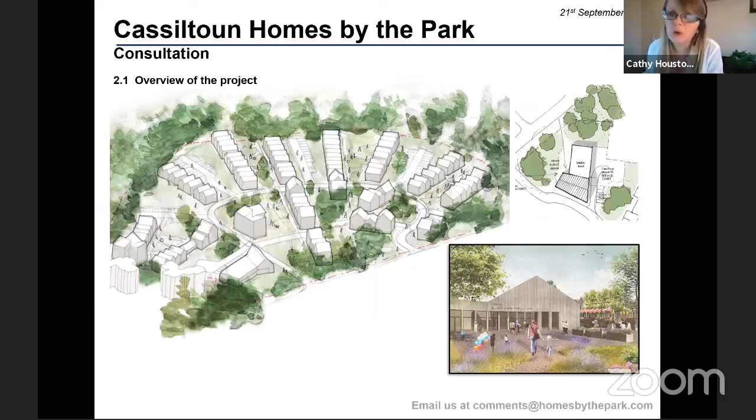So to give you a quick overview of what's proposed, there are two principal elements: there's the housing and there's a social enterprise and wellbeing centre proposed as part of the scheme. On the housing side, we're exploring the possibility of up to 140 homes within the site. These will be a mix of tenures, affordable housing, private housing, for different types of households, so families, young couples, elderly, people with restricted mobility, wheelchair accessible homes.

The Social Enterprise and Wellbeing Centre is a key part of the proposal. This is a new building to allow Cassiltoun Housing Association to continue a lot of the good work that they already do, providing additional community space, facilities for horticultural workers, and supporting other local organisations, for example those involved in childcare and horticultural growing. Cassiltoun are working hard behind the scenes to secure funding for this, and we would welcome any feedback on this also as part of this consultation.

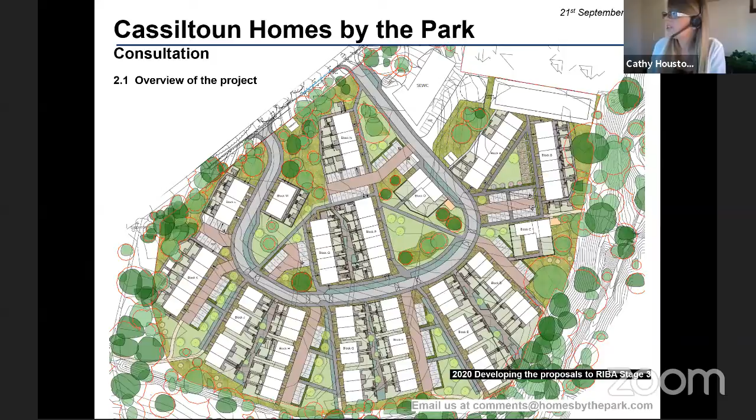So here's what we know about the site. I thought it was useful to cover this. The site uniquely benefits from having one of the most distinctive and attractive parklands in Glasgow on its doorstep. Castlemilk Park contains some of the oldest trees in Glasgow and is part of a designed landscape of fish ponds, walkways, bridges, heritage trails and community artworks.

The parkland is also a focal point for activities led by Cassiltoun Housing Association and others. The Housing Association is very active within their neighbourhood with a dedicated community development officer, a woodlands officer and a regeneration manager. The team successfully deliver an annual programme of events each year with the parkland as the principal venue for a lot of the activities such as wildflower walks, woodland strollers clubs, inspiring nature events, family fun days and festivals and various other things.

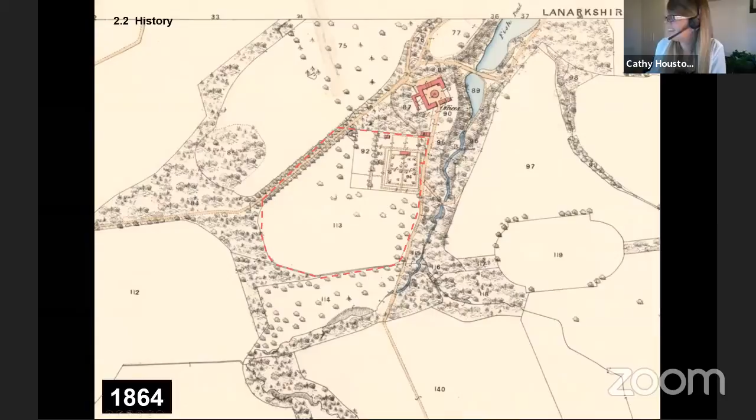So the site benefits from having a rich and varied history, and the wealth of information available is significant. I'm going to skip through a few of the historic plans because we do have quite a few - a lot of this information will be available on the website if anyone wishes to jump back in and have another look. Starting at 1864, this is our oldest plan, with early signs of development taking place.

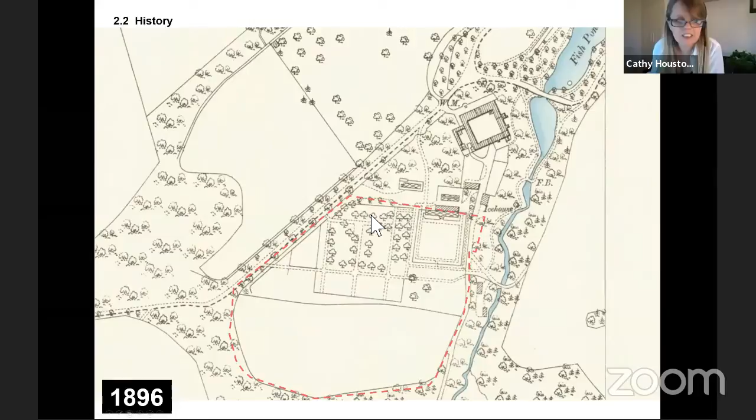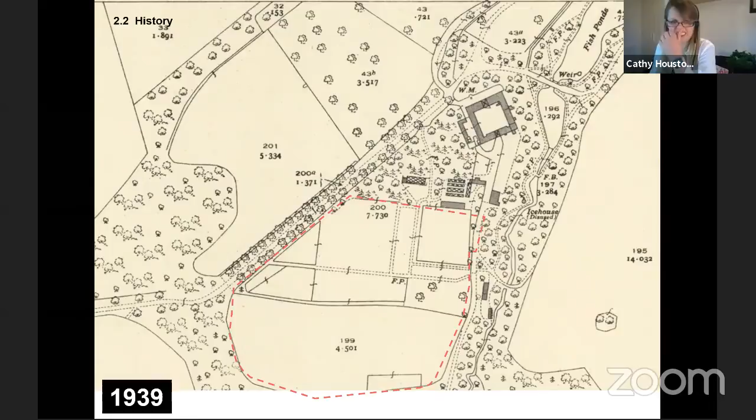But in 1953, if you look at the walled garden here, you start to see there's a lot more going on within the site, and there's further greenhouses and other development happening. So this is quite an interesting plan.

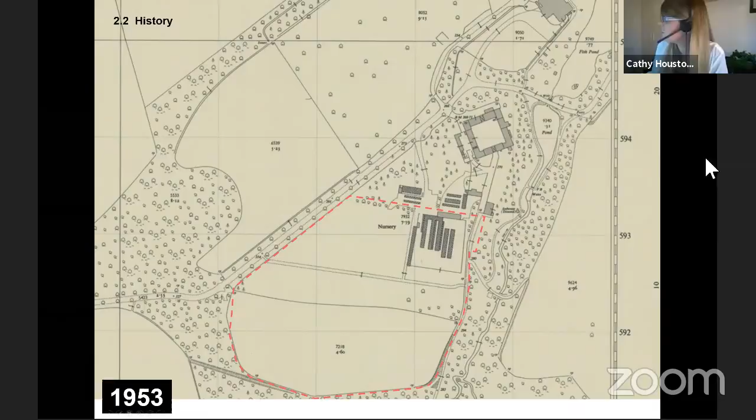It does suggest, with all of the growing going on in the site, and the fact that this was taking place just after the war, whether this may have coincided with rationing or some other activities. So there is quite a diverse history to the site.

And there's exhibitions and items on permanent display in Cassiltoun Housing Association's foyer as well, which everyone can pop in and have a look once the restrictions are lifted, obviously.

The level of interest is also significant. So we have the Cassiltoun History Facebook page with well over 1,000 pictures, quite an impressive back catalogue of information. It's arranged in 148 folders and it's uploaded by the members of the public, and it's continuing to grow as a fantastic resource and archive for Castlemilk.

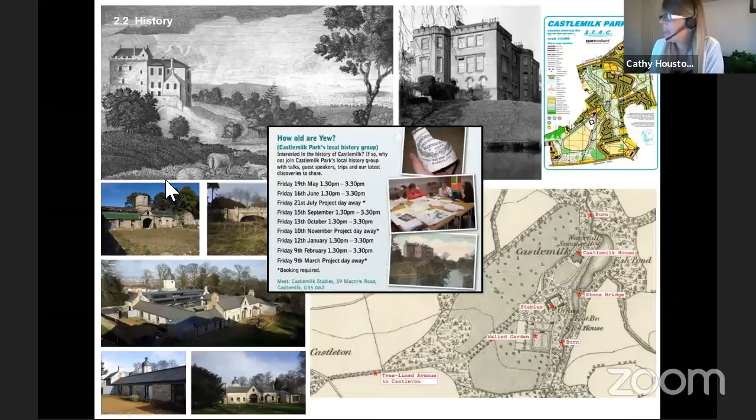The history of the site has been a primary consideration for us in the development of the proposals. And it's in this plan, this annotated plan, that we start to pick out some of the key features of the site that we're hoping to pick up on in the development of the proposals.

Heritage is important, and we have consulted West of Scotland Archaeology Service, who are part of the planning department, and they have been approached for their input as well. So we can see them becoming more involved as the proposals developed.

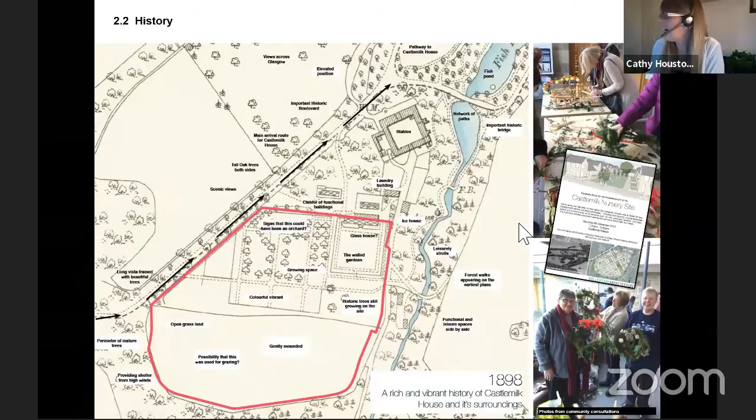And importantly, there's the natural heritage of the site. It is presented within the park itself. The park itself is a designed landscape of pathways and bridges, diverse and exotic species of trees, some of the oldest in Glasgow. And there's the legacy of William Gilchrist, the person who actually planted a lot of these trees and planned the park.

And the landscape architect is going to pick up on this in their presentation, because I think there is so much we can learn from when we celebrate and look at the trees that are there within the park itself. So moving forward, just the next slide.

We have sought to reference the rich history as a primary influence in the development of the proposals. So for example, architectural forms, the walled garden, the stables, is it possible to echo this within the design of housing, courtyards, or the streetscape? The design landscapes, as we mentioned there, acknowledging the role of William Gilchrist.

Respecting the boulevard of trees along Barlia Way, or Barlia Terrace, symbolically important as the principal arrival to Castlemilk House. How do the buildings engage with this frontage, considering also the hierarchy of streets and how to enhance this principal route with improved overlooking, safer and more pleasant routes to walk along.

Ideas of a self-sustaining estate, so this idea of orchards, vegetable gardens, ponds, stables, providing food, water, transportation and shelter, mirrored in the proposals with warm homes, local employment opportunities and food growing. Sustainability is going to be a paramount consideration moving forward.

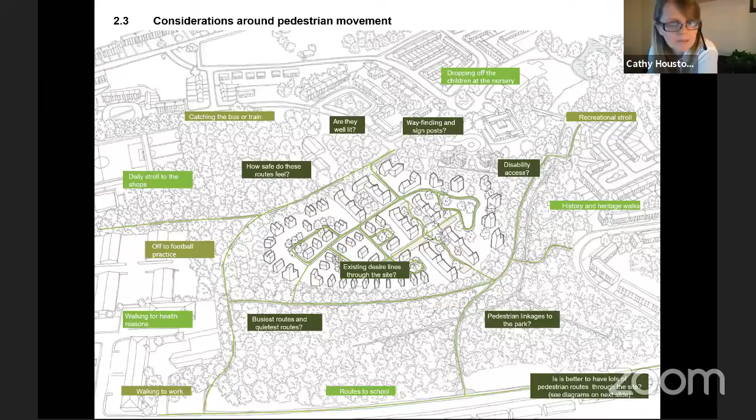Likewise, thinking about vehicles is an important consideration with any development here. The challenge we have is mainly the levels, since it isn't a flat site, so we have to think about how to integrate a road within this development sensitively.

At one point we were asked to look at a range of options for vehicle access, for example from Ardencraig Road, but that was quickly ruled out because it would have taken a route through the park itself, and we know the park is a very precious and valuable asset of that neighbourhood, so we didn't want to disturb that.

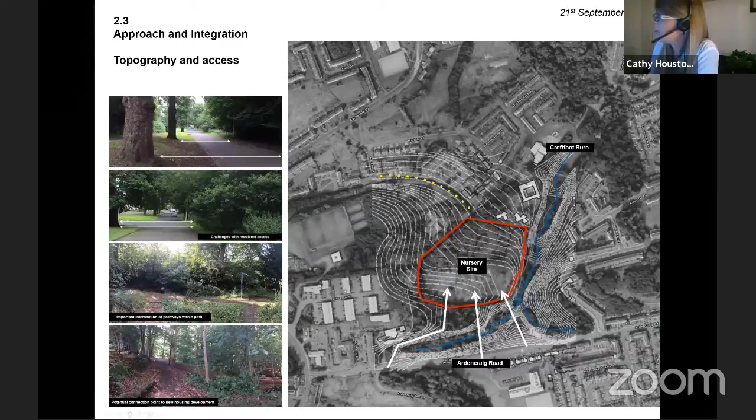So we've been looking at that very carefully and considering the options moving forward. Our approach was really to keep it as simple as possible, having one way in, one way out, and a very simple circuit of roads.

So moving on to the next stage, this was our feasibility stage layout, still very highly conceptual, but you can start to see a lot of these ideas in visual form around character areas and neighbourhoods. We're identifying opportunities for village greens, pocket parks, and thinking about creating our own avenue of trees to mirror what we have in Barlia Terrace at the moment, but with new trees. So this was a very first layout and thinking about how we might develop this.

We've been looking to government guidance and best practice approaches, Designing for Streets, a document published by the Scottish Government which considers street design and ease of movement. So certain things we'd be looking to do, such as making sure spaces are well overlooked to ensure they feel safe and pleasant, and thinking about what we can do to create a welcoming development, taking this public building and positioning it on the corner as a gateway feature.

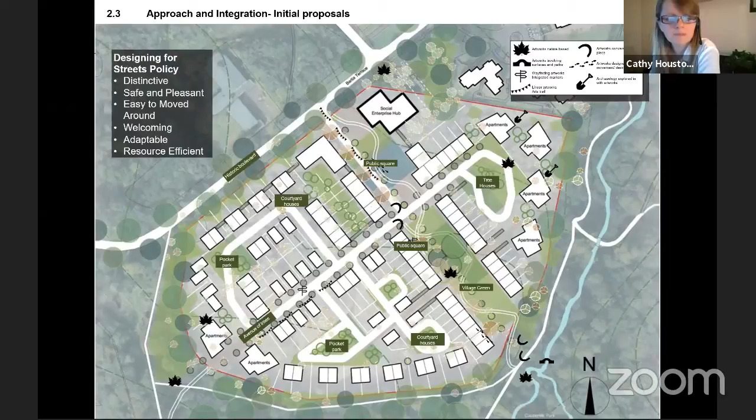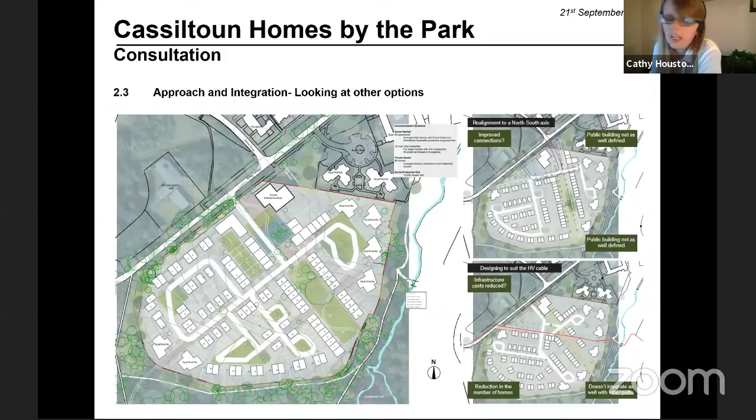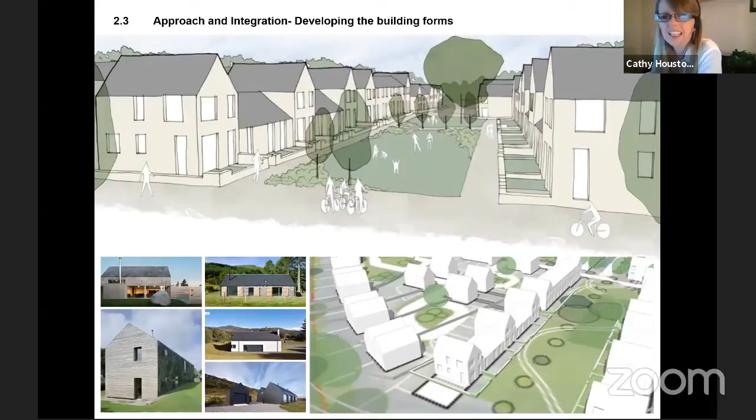So at feasibility stage, we did explore a number of layouts, realignments to suit different efficiencies and orientation. We also thought about building forms. This is one of our earliest hand sketches, where we were exploring the spaces between buildings and what they might feel like. Everything is quite low rise, and the idea is to try and integrate as much as possible.

On this next slide, we actually started to look at the detail of building plans as well. In particular, we were drawn to these simple geometric forms of the stables building itself, and I've shown some examples on the right of how you might interpret those gable-like forms in the design of a new development.

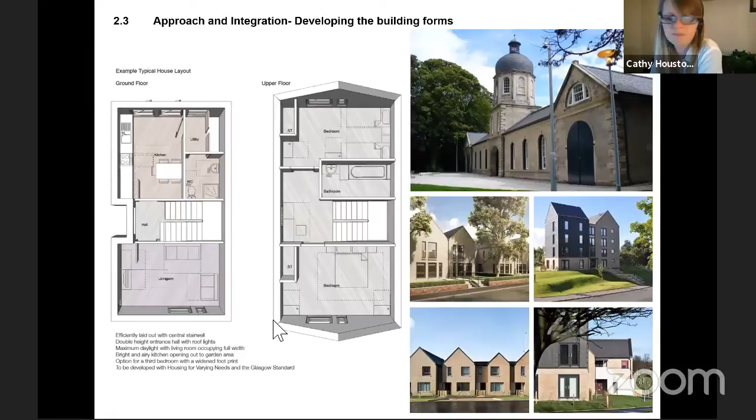So moving on, I'd like to talk about the Social Enterprise and Wellbeing Centre. Again, that's a really important part of the proposals and another fantastic opportunity for this development. Cassiltoun Housing Association are currently investigating opportunities for external grant assistance to develop this building. It's to serve two principal purposes.

The first is a base for Cassiltoun Housing Association's maintenance team, as they had a previous study that identified a need for a new building, and this was one of the options to commission a new purpose-built facility.

But also to serve the community, allowing Cassiltoun Housing Association to further develop their busy programme of events and activities with a range of multi-purpose rooms, and also working with other organisations locally to look at how they might use the rooms within this building as well.

An important point to note, the Social Enterprise and Wellbeing Centre is moving forward to a different timescale from the housing. So it's likely we would see the housing move first, and then hopefully, subject to funding and various other considerations, the Social Enterprise and Wellbeing Centre will follow.

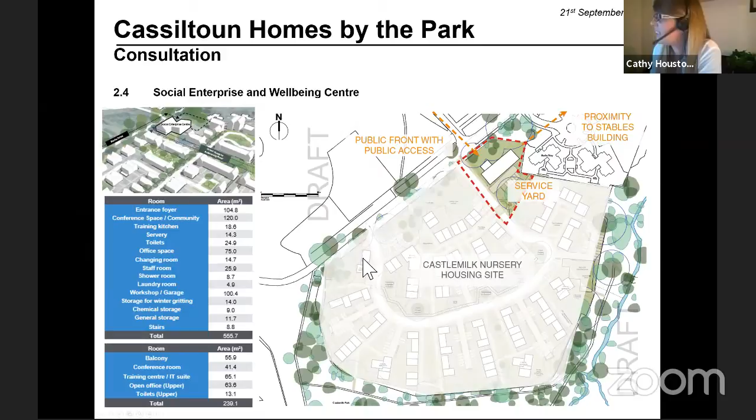On this slide, I won't dwell on it too much because this was from the feasibility stage, but on the left there you can see the accommodation schedule, and that gives you a feel for the type of spaces that we were looking at.

Moving forward, Cassiltoun had actually been in touch with other organisations, other stakeholders, and had invited them along to look at opportunities. For example, we were in touch with an organisation that has an outdoor forest nursery - they were looking for a base, so this building was potentially an opportunity. And also in touch with a local after-school group, potentially providing space for out-of-hours care for children and activities and various other things.

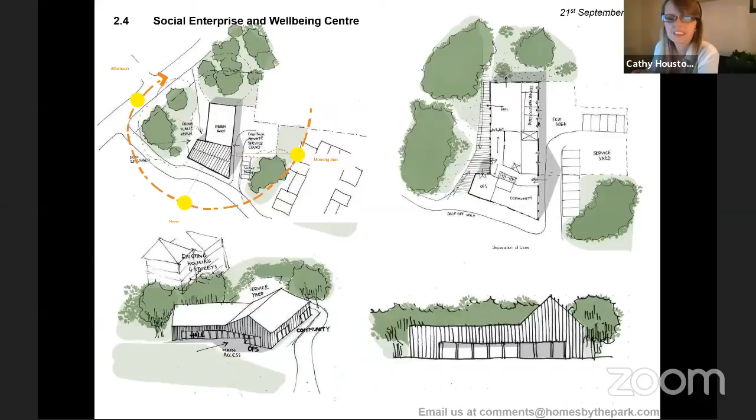So in some ways the brief has expanded, but if anything it has led to new ideas and new proposals. And in particular in this next slide...

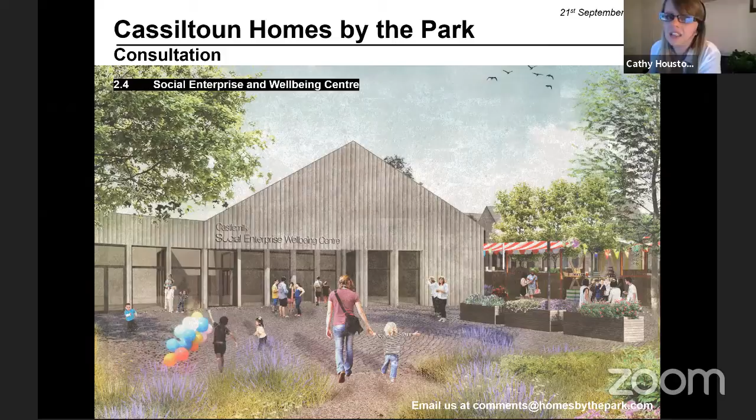Here we can see a concept image of what the building might look like, but what this shows is that the outdoors is as important as indoors as well, and this is where working with the landscape architect has been quite interesting, looking at opportunities for spaces for outdoor gatherings, community food growing and natural play. So there's a few ideas starting to evolve specific to the Social Enterprise and Wellbeing Centre.

So moving on, this is where I'm going to talk about the proposals and where we are now.

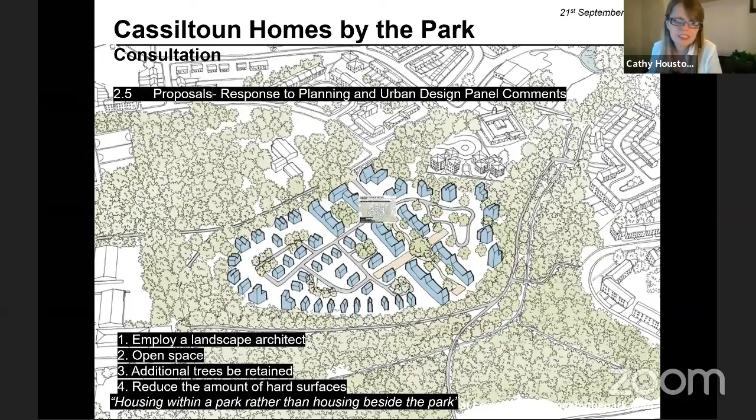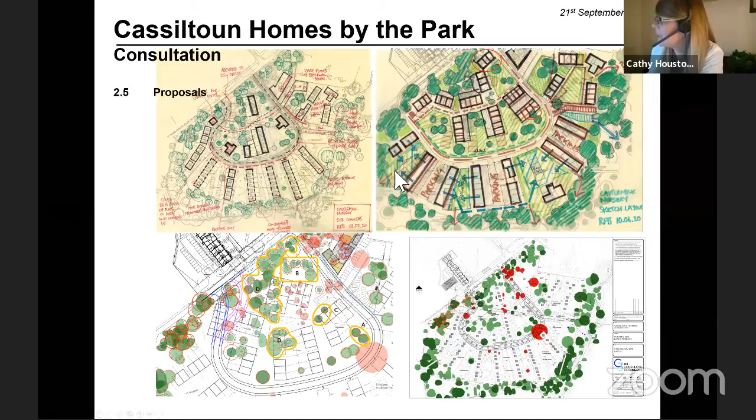So what followed was a very busy exercise, and this is what we've been doing for the last couple of months - a lot of sketching and technical analysis involving both the landscape architect and the engineer working side by side to consider the issues. We can see in some of these diagrams the specifics of levels considerations, tree positions - very important - how we're dealing with surface water management as well, and the design of fronts and backs. So there's been a lot going on.

We did have a review of the tree survey. In fact, we went back out - a further tree survey was organised. In particular, we were looking at some of these very dense corners, because you can see from this plan here, with the circles depicting the trees, that there are some areas, particularly around the edge, where it is very dense. Those light green areas are where we have large areas of shrubs. We actually got the surveyor back out to pinpoint a little bit more accurately some of the features within those areas, and that has been very useful for us, so we can learn more about the trees and what we can keep.

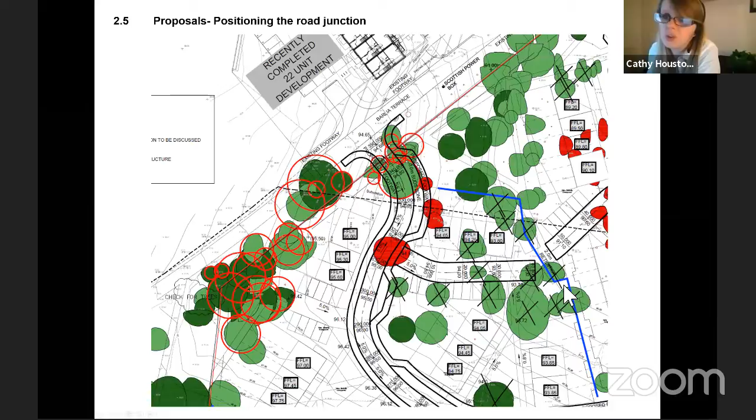The landscape architect is going to pick up on this a bit more in their presentation. Just to give you an idea of the level of detail, a big part of this has been looking at how we can take our pathways and roads and position them so that they meander and wind through the development rather than through areas of important trees. This diagram in particular shows how we were looking at forming a connection to Barlia Terrace whilst minimising any impact on the trees. So that's the level of detail we're at right now.

This is in the context of retained trees whose roots would need to be carefully measured, as we can't dig down around trees, nor can we pile soil on top. So we have to work as closely as possible to the existing levels.

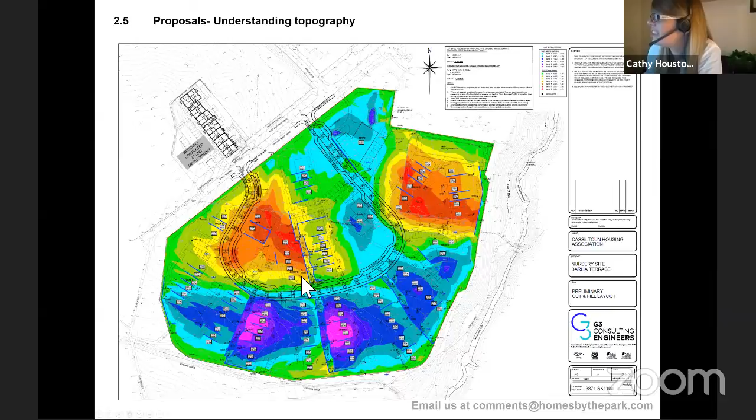Finally, this is the overall site layout, where we've arrived at the moment. We have a single loop road that comes in and out of the site. This has the advantage of no reversing, which is particularly useful if you're designing a development for families and children, so bin lorries can come in and out without having to reverse. This route has been carefully chosen to try and avoid trees where possible.

We've thought about routes for pedestrians, safer routes, pedestrian-prioritised environments, thinking about how people might walk from Barlia Terrace at the top here through to the park itself, so there are continuous routes.

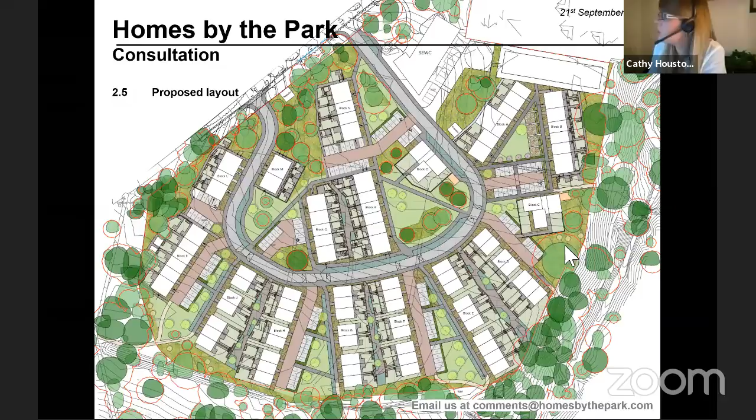So the next image - this is an image that we keep coming back to, and you'll have seen this already in the presentation, as we feel it does capture the overall intent. To summarise, the intent is to sensitively integrate amongst the trees, create desirable homes, places where people would want to live, and importantly, respect the local context, allowing routes through and allowing for wildlife and nature to continue to thrive. This is our summary image in terms of the proposed development.

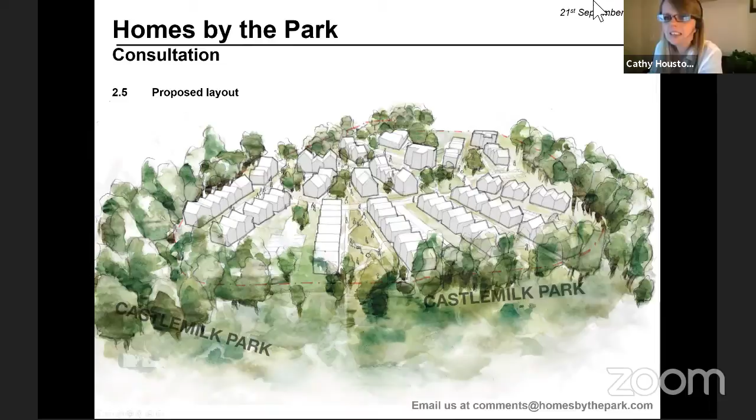Yep, I think that should be me on now. Right, yeah, I'm Iain Lyon. I am project landscape architect on this project, a project that we're really excited to be involved in.

It all started for us when our involvement was following the feasibility stage, and the idea that they wanted to have a landscape architect involved. From our perspective, we recognised it was a large site with lots of trees, and therefore there was going to be a lot of consideration required to address the number of trees on the site.

If we go on to the next image - this goes back to the idea of the concept of being housing within a woodland park rather than beside one. This has been quite a consistent theme throughout the presentation, which has been really fun and enjoyable to be part of. But some people have asked us, well, what does that actually mean? What does that look like?

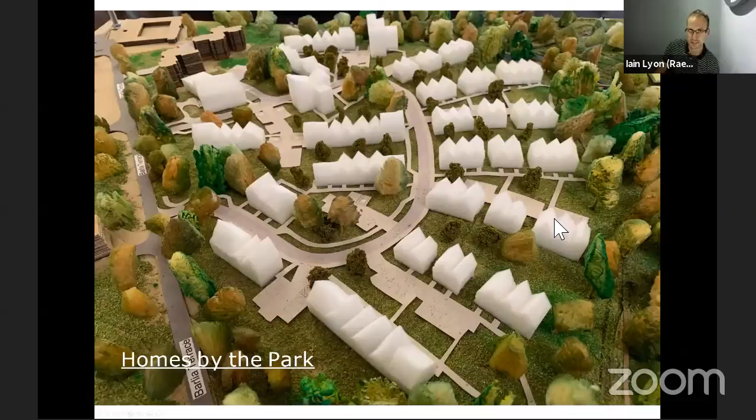A few other willow tunnels, etc. And then this is actually the updated model, which Cathy referred to right at the start of the presentation. This was completed a few weeks ago, but it really shows a real richness to how the woodland ties into the development. So I believe that's now available within Cassiltoun's stables building, and should be available for view soon.

So the real question is, how can you guys help? We had a consultation event a couple of weeks ago where we were presenting some of these schemes and also coming up with lots of ideas. I think it is important that we need your ideas, because it's important to forge the community's ideas into the scheme, and really push it forward.

And I think that'll allow you, Cathy, to move on to the next stage.